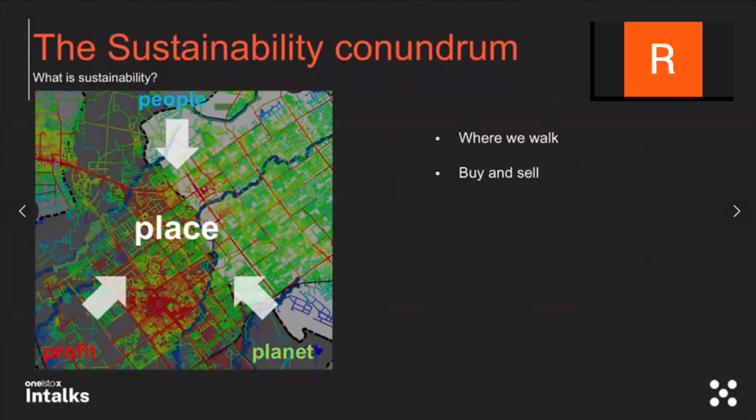But why place? Place is where we walk. It is what we buy and sell. We may be drawing the walls and doors and windows and slabs and waterproofing and foundations when we do buildings, but we are not selling the foundations. We are not selling the walls. We are not chosen. We don't do design because we are good at detailing walls. We do design because it is space that we are engaging with.

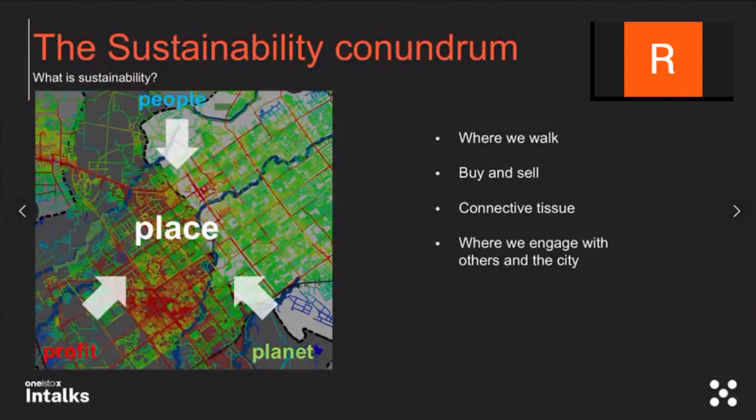It is the connective tissue. It connects the most private parts of our house through to the most public parts of the city. It is where we engage with others and with the city. It links people together. And so we need to ask ourselves a different question: what is the problem of space?

The problem of space was first articulated in the 50s, 60s, and 70s in the UK when rich people in London wanted to move to the suburbs, and there were a number of developers who tried to create these high-value village developments to attract this moving population. But time and time again, they failed to create a village feel, and we can see it in our townships today and in certain urban scenarios where we've got the buildings, we seem to have the knowledge, the technical know-how, we have engineering at our disposal, we have urban theory at our disposal, and yet we fail to create this sense of life and liveliness.

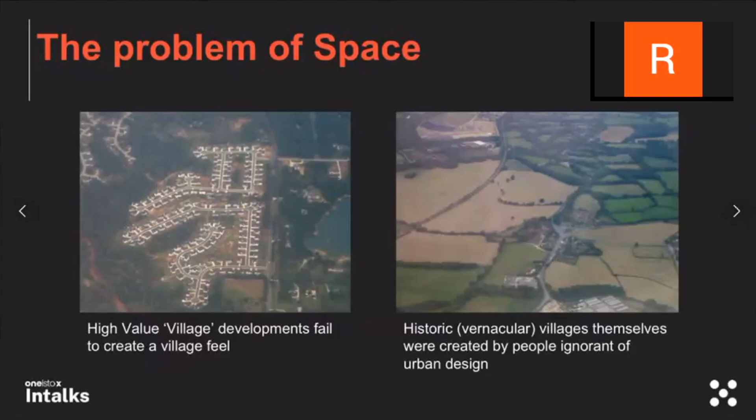Historic villages, which is what we are trying to copy, urban centers, which is what we are trying to copy, buzz, which is what we are trying to create, was created by people ignorant of urban design.

Bill Hillier and Julienne Hanson, and I've been lucky enough to be taught by both of them, published a book called The Social Logic of Space.

This was a seminal work which changed the way we think about space. Up until then, space was always considered as the background to human behavior, the stage upon which we acted. But what Bill and Julienne did was say it's not a stage, it's part of the act.

Space is an equal member in defining how we engage with each other, with the cities and buildings around us, with our families inside our houses, with our colleagues in office settings. Space is now not a neutral background; it is part of the power relations, the interactions of capital, of social capital, of means of control. Space is one of those.

They identified two problems that we need to understand. The first problem is: how does society get into space? And I want to ask you a question.

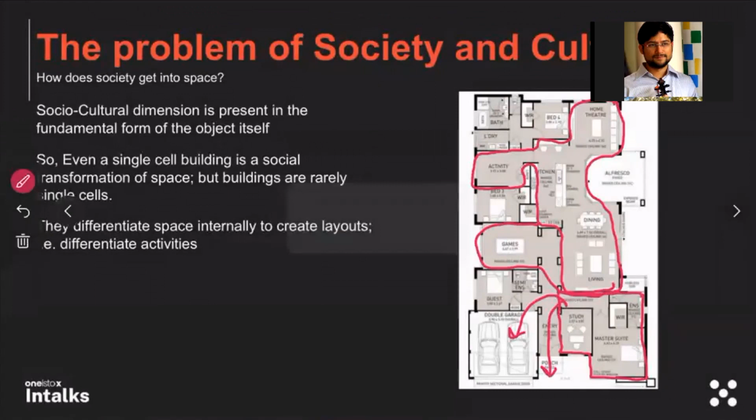So we can quickly look at this layout and all of us would be able to say, yes, this is a house which is a party house. So we are very good at reading plans. We are good at being able to look at this plan and understand how this layout modulates certain types of behaviors and modulates different activities.

And so what this layout does is it represents a model, a cultural model of how these activities are realized in space. Let me try and put it this way. Most of us in India, if we are asked to draw a house, would assume that the kitchen is for cooking in. And we would put it slightly to the edge of the house, A, for ventilation, and B, because often it's not us really cooking in there - we may have a cook, or somebody who's going to prepare our meals. The dining room is the area where food magically appears.

But if you look at a British house, the kitchen has the dining table in it. The kitchen is where you all sit when you come home from work, college, or school. That's where you sit with your computer. That's where you sit with your book. The kitchen is what we would call the family lounge.

Different cultures have different relationships between the acts of eating, cooking, entertaining, being a family, sleeping, using the bathroom. For Indians, a bathroom is a very private space. It sits in the most isolated corner of a house. In other cultures, the bathroom is in the hall, the first thing you see when you enter the house. Going to the bathroom is not such a private space there. Your bedroom is very private, but not the bathroom.

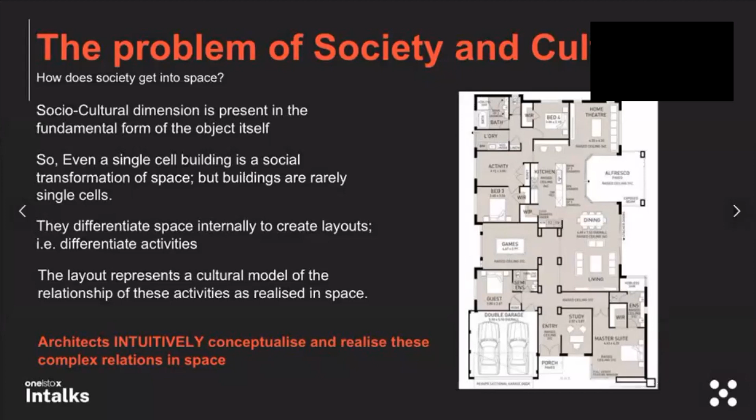But remember I said it's very difficult for us to talk about things? We've got a few more questions for you. How do we describe space? Could you describe some of these in a word or two?

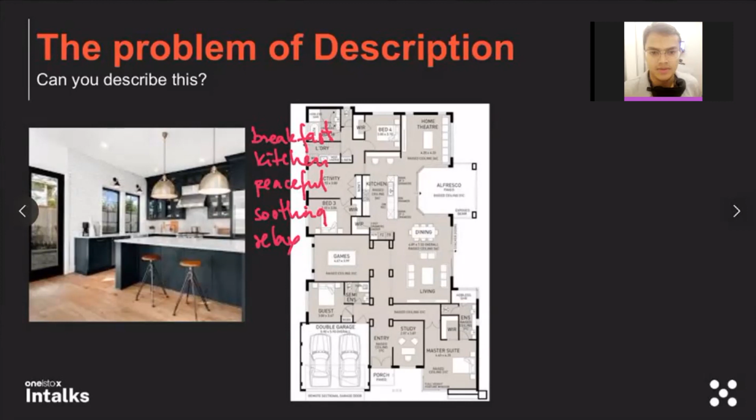Hello, hello, could you please speak up? Your voice is a little... Yeah, so in the first image, what I was able to understand was that it looked like an open space, which kind of invited discussions and conversations.

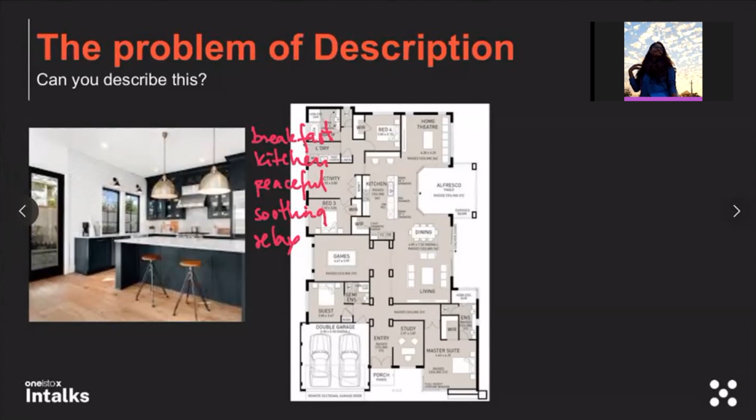Right. Can you hear me? Perfect.

So the second one, how would you describe it? Is it an easy thing to do? I think we're getting a bit short of time, so I might go a bit quick on this bit.

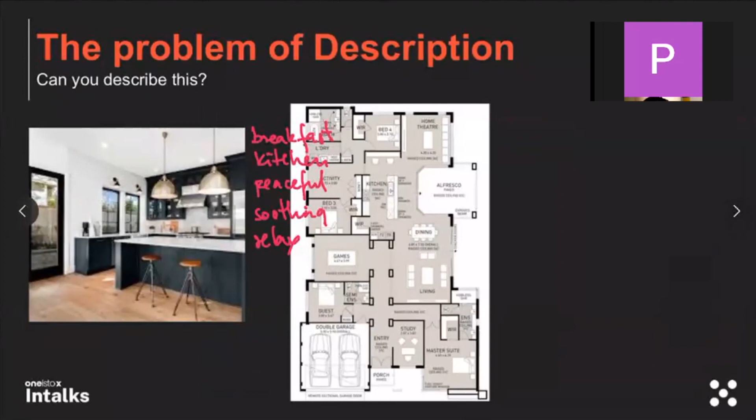Generally, we describe spaces according to their geometry, their materiality, their functionality. Most of the descriptions we've got describe what the space does, sense of light or air. For a plan, most of us would describe it as: you enter, there's a study on the left, a guest room, the master suite is tucked into a corner on the right, then you come out into this games and eating area. So what we are doing is describing a sequence of experiences, a sequence of activities as we penetrate from the outside to the inside.

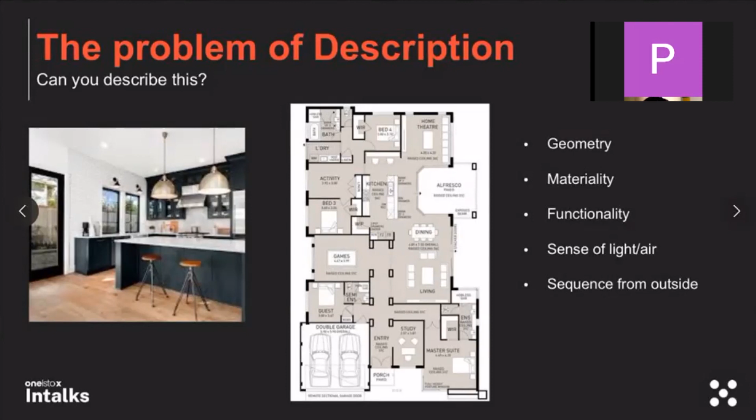We might describe a city as radial or linear. We might talk about the grain size. Again, what are we doing? We are describing the geometry, the materiality, the functionality, sense of light, maybe a sequence or lifestyle as we did before.

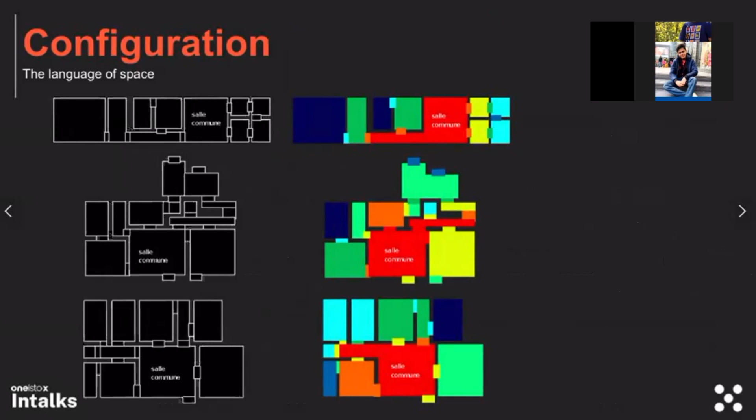And so, even though the geometry is different, there is evidence of culture manifesting in the spatial layout. And so we can understand what we call a culturally variable spatial meaning to the idea of function.

Going back, we need to divvy up space into different bits. We've just done this one where we made a room into a space. We can also make it as lines, and we can also make it as visual fields. If we do this, we get three different types of analysis. We've just done this one where we see a convex analysis, and each room is defined as one space.

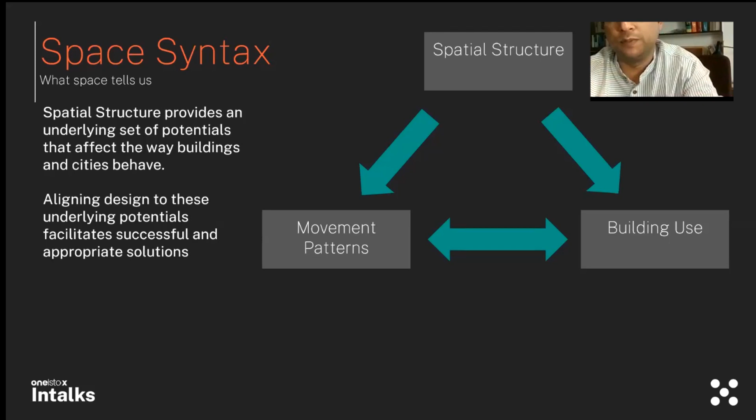And so spatial structure provides the underlying set of potentials that affect the way buildings and cities behave. If we first understand them, identify them, describe them, and then we align our design to these underlying potentials, we are able to facilitate successful and appropriate solutions. And these solutions are aligned to what I would call the least cost movement network. And as such, we call this spatial sustainability.

And this spatial sustainability is the central point from which we can achieve economic sustainability, social sustainability, and environmental sustainability. So it is this nexus of place, this nexus of understanding that places, spaces - they have their own rules. They are part of the game.

They are not just the background, and we can't put a mall wherever we want. They are the underlying reason why things happen the way they happen. And when we understand this, we can build that network back together and actually get sustainability in its entirety.

I think, Arunima, that's all we have time for right now. So we actually do have a Q&A section.

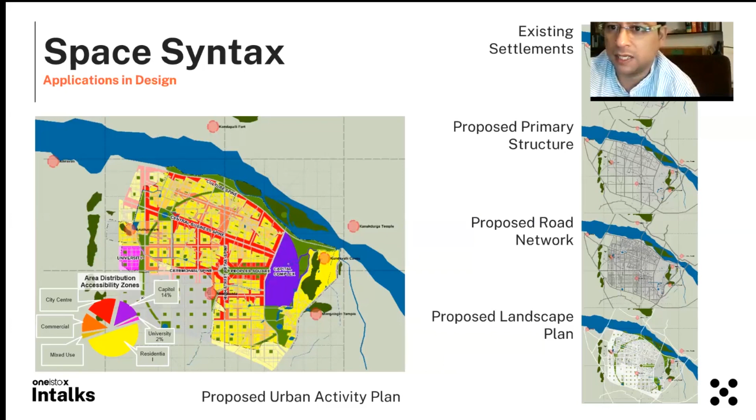Okay, so I can quickly show you some things, a master plan which is aligned to networks, proposals which you can do a before and after, or an option 1 and an option 2, and you can define how things are going to change the way cities are. You can define the zones which are going to become active, define the real estate value, define the economic benefits as well as the social.

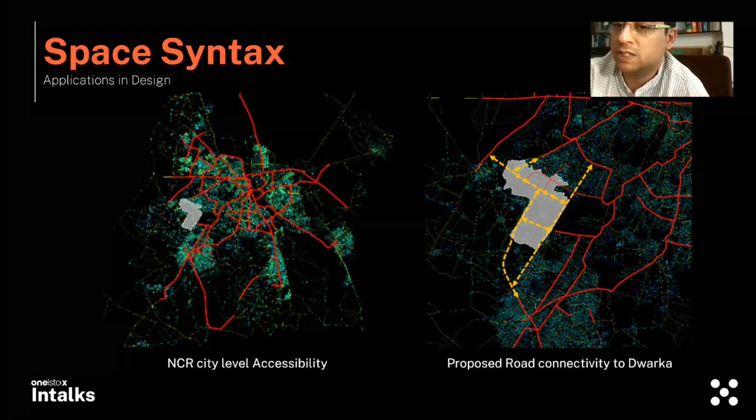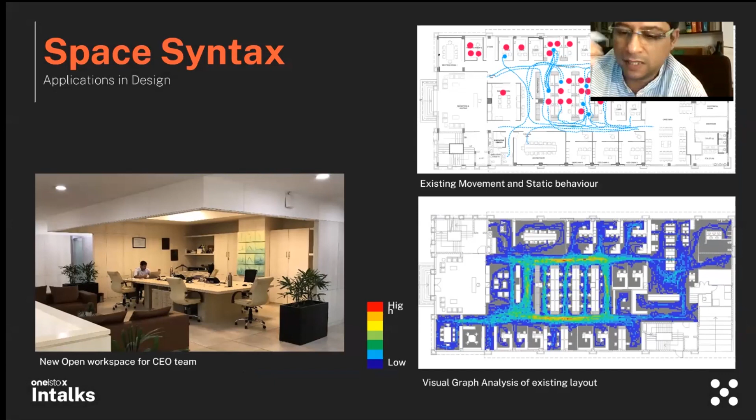There's an office network, which interestingly, doing a network like this, we were able to put our CEO team right in the center of the office and increase their efficiency by like 100%. And that's it.